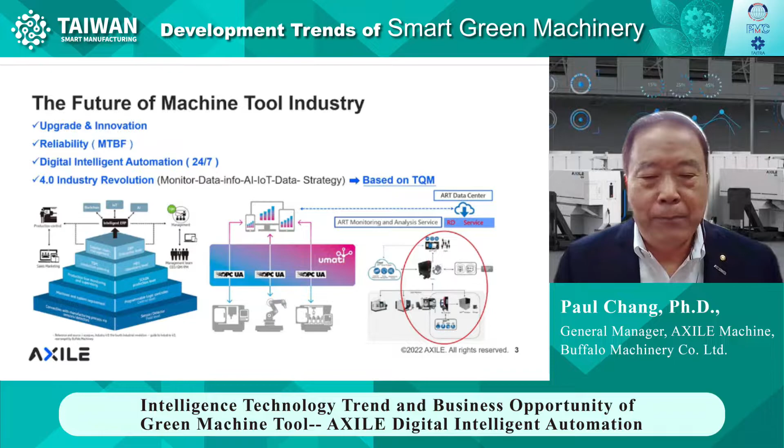Then we're talking about the 4th industrial revolution. It is, of course, based on TQM, total quality management. Only this way can you then match perfectly. Here to give you an outline about the 4th industrial revolution. The idea is that no matter the business, you have one factory in one city, or several factories in one city, or you may have a global company with several factories in several different countries.

If all the machines meet the standard of 4th generation, then you will be able to share all the machine data and machine information to the cloud, and then go back to the headquarters management and planning department. So this is the way you are going to save and control all the production plan. That's the first very important concept that you may like to know.

Definitely, with this information, you will be able to do something like AI monitoring data. You will be able to have 2 weeks prior service notice just to make sure that you don't wait until the machine breaks down and then wait for the parts, wait for the service, and it takes too long. If you have 2 weeks prior notice, then definitely you have enough time to find the proper time and invite the technician to come to do the service.

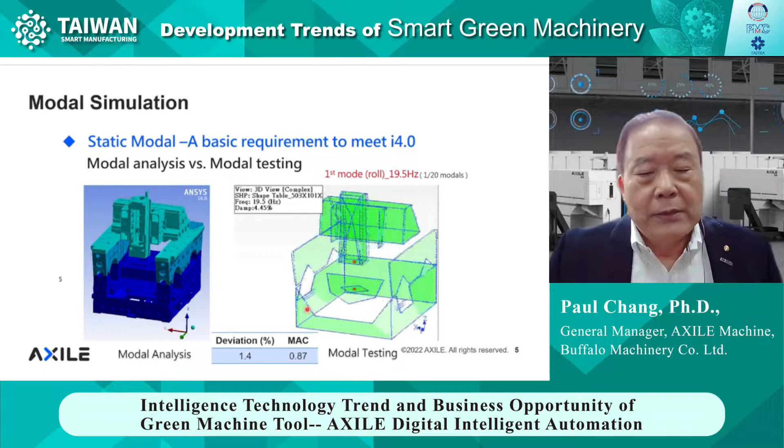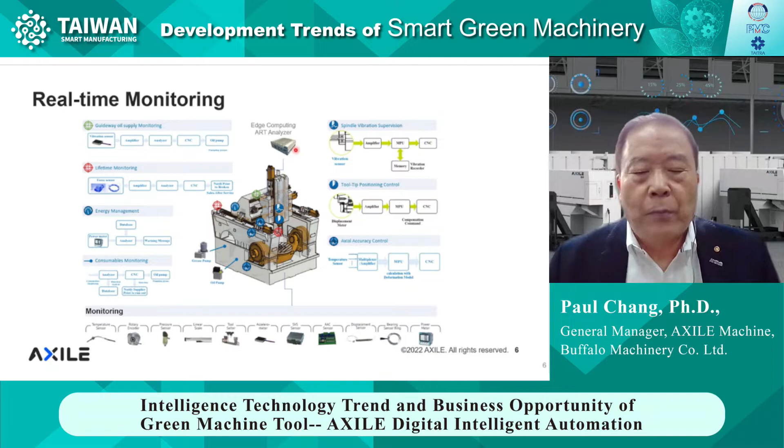So this is just to give you an idea - we use all different kinds of sensors to catch all the conditions on the machines, so it will be able to know the machine condition in time. With this information, we give it to the analyzer, which is the AI system, and then you'll be able to convert it into information shared with management.

Go a little bit further down - when we have all the sensors to monitor not only the CNC data, but also liquid, meaning hydraulic or air, and also the wearing components, then you know the condition of all the parts exactly. Then you'd like to know the life of the machines.

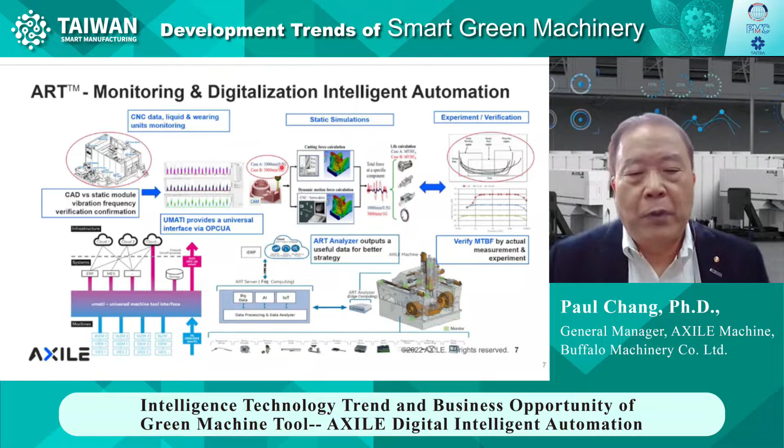So you have the so-called MTBF, and this is really a simulation. You give two different conditions, for example half G and 1G acceleration, and by this way you work out your MTBF value. But this is, of course, a simulation value. After that, you may like to do a long-time experiment to prove that the simulation meets that value, and then you can give it to the customer precisely.

And coming down to here, as we say, we use many sensors, and through the ART analyzer it becomes big data, and with the AI calculation, you get all the information shared to the cloud, and management can use that. This means not only people working in the company, but also if management goes home and would like to know in-time information, they'll be able to use their portable device like their pad, their computer, or their iPhone - they can check right away.

But one condition very important is that the information coming out and shared with management should meet one standard. For the European market, it is today called OPCUA - it's contributed by CECIMO, they call it UMATI. You have to meet this standard, and then anytime when you sell one machine to a factory, they already have a 4.0 system, they'll be able to exchange information with all the different brands of machines. So that is one thing very important - you make sure you want to do it this way.

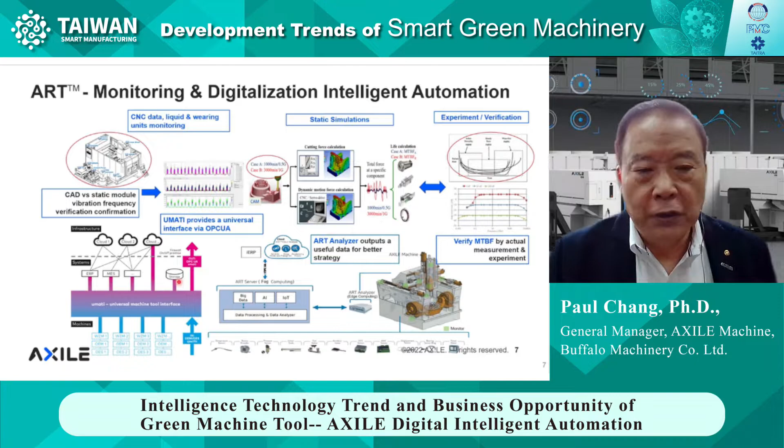Then let's go further to know how the monitoring system works. With the ART system, the monitoring system, you have two levels to see. The first level is immediately you're going to see all the machines under control - their working condition you can see right away. Then you go further down to the second level, you can see every component shown by figures. So you have all these figures, you know what's going on with the machines. And this data, as I mentioned earlier, you'll be able to see on the portable device.

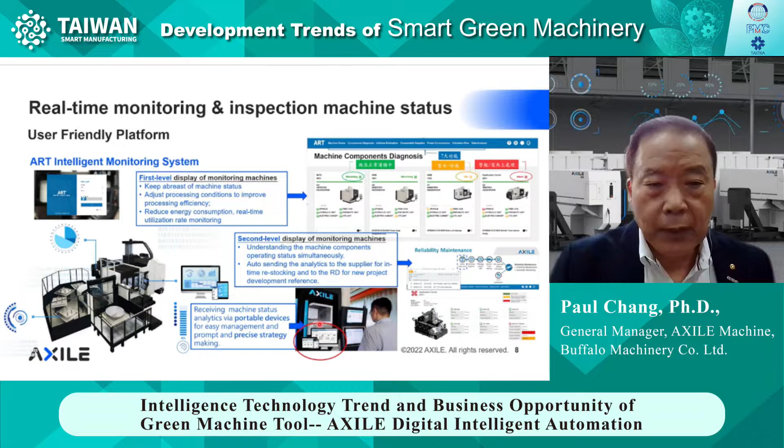So this is the first step about the design. Then I would like to go further - it's also important to consider the life estimation of the machines. We all know when you try to get a big order, you'd like to know how long the machine can run continuously, so lifetime becomes such an important issue, as well as utilization of the machines.

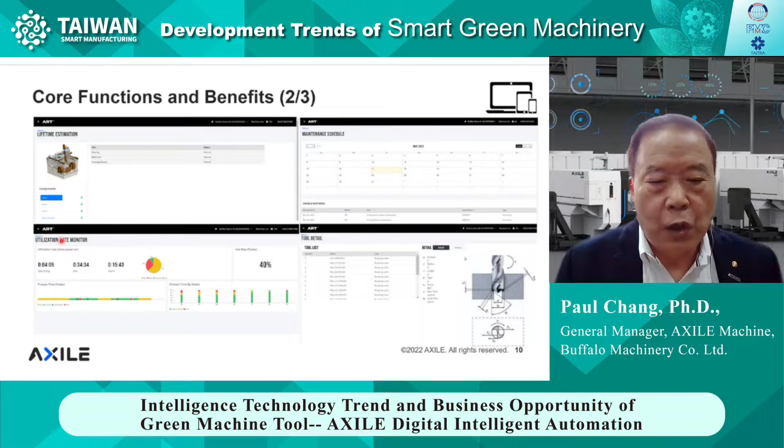It's not only to see your productivity, but also to know if you can meet the target time you'd like to deliver the job back to the customer. So all this information you can find from the ART system. Power consumption is definitely becoming very important today as we're talking about ESG globally, and every piece of equipment costs some power.

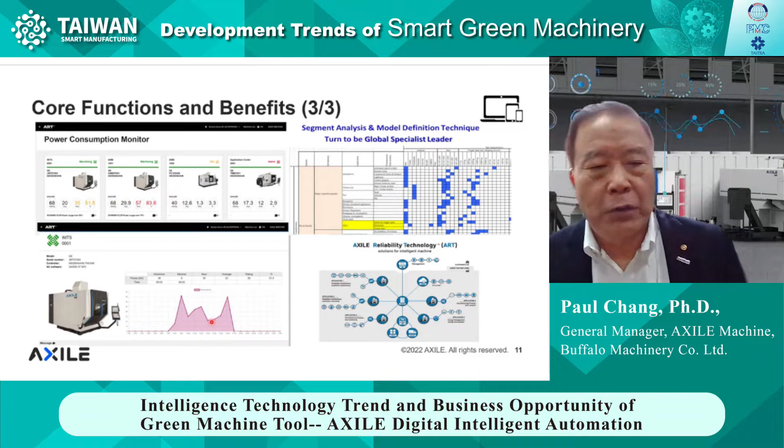It's important to use the machine under the best condition. You can look back over the last 30 days and see which days the machine cost more energy because the program wasn't under perfect condition, or the tool wasn't in good condition. By looking back 30 days, you can see that for certain periods you actually cost a lot of energy, and this energy equals the carbon you created. It costs you money. So management may like to check every regular cycle to see if the machining program is right, and also check the tool quality to make sure the work is perfect.

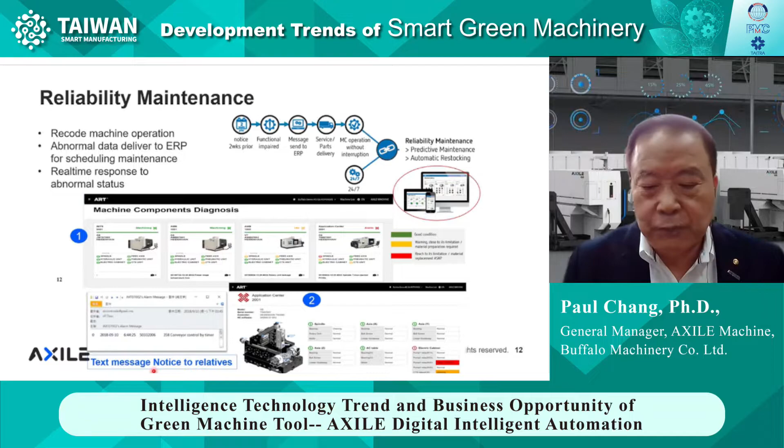For reliability maintenance, whenever one of the components is nearly going out, not only does the system notify management to send word back to the manufacturer, but the operator also gets a text message right away. So he knows one of the components is nearly out, and he can make an appointment to fix the machine and make sure it's working perfectly.

So let's talk again about energy management. Energy is related to carbon reduction, as we've been discussing a lot today. Later on, I'm going to share with you directly the information from Malaysia, so you'll know even with big power machines, how you can save your energy.

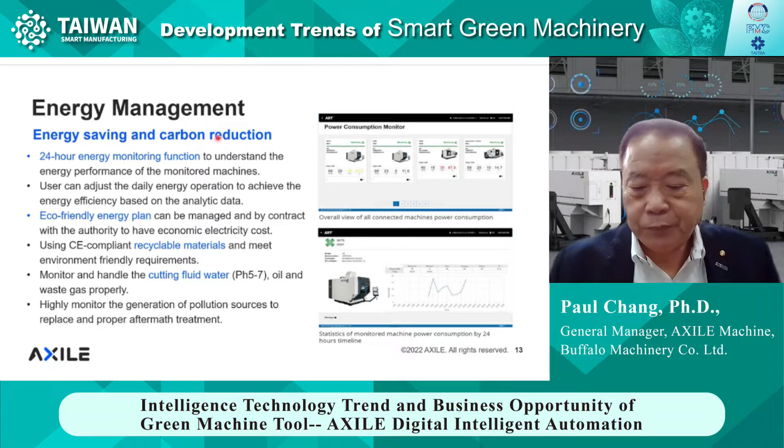From AXILE, we have all different kinds of automation machines, the 5-axis types. We want to make sure every machine can run 24/7, which means this is digital intelligent automation. It's no longer a traditional long working line, where you have one line with many machines, but if one machine breaks, the whole production line stops. This is a totally different concept.

Why a 5-axis machine? Because with a 5-axis machine, you can put one working piece on the table and complete the entire machining job already. Also very important is tool life prediction, which is included in our ART system. Tool life means knowing under which conditions the tool is working properly. If it's not, you have to change the tool. So we keep monitoring the tool condition, and in case one tool goes out of standard, you get a message too. This makes sure the machine is always cutting under good condition.

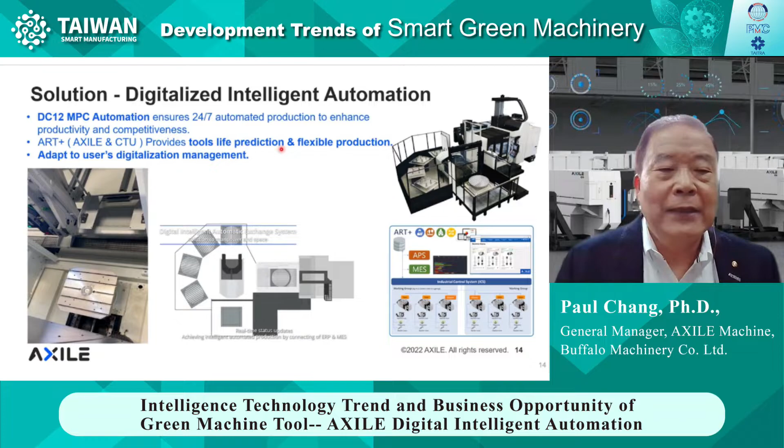After the raw data comes in, the AI calculation produces such a report, so management can easily know how the machine is being applied and used. For example, this single machine which we sold to a local customer - when we get the message, you can find two things immediately: what's going on with the x-axis, y-axis, and z-axis not moving, which means the machine isn't being used. Why isn't it being used? Management may like to know.

We would like all the axes to move almost the same distance, because then you know the machine is always under normal condition - not just one axis being heavily applied while the other isn't. Looking at this table, you can see the y-axis traveled almost 2.5 times more than the x-axis and z-axis. But the x-axis, the biggest axis, isn't moving. Why is that? That's a program issue. So you'd like to change the program and tell the people, so they know how to perform under the best condition.

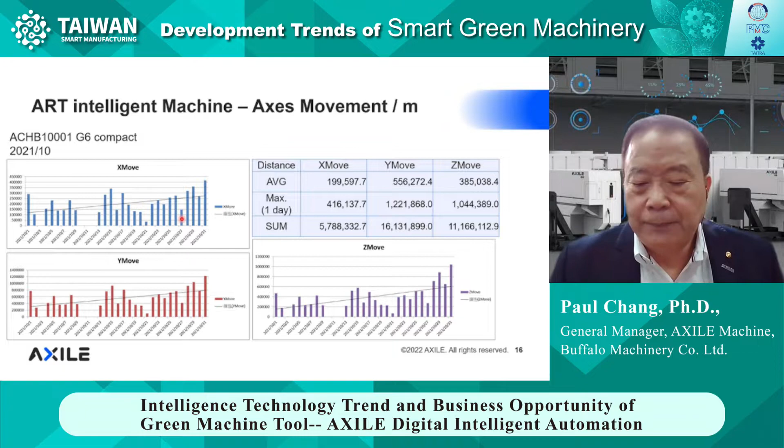Here is about lubrication. Oil can create a lot of problems. Our machine doesn't use liquid coolant or liquid hydraulic, but if lubrication oil gets into the coolant water, you create a huge quantity of rubbish coolant. This dirty coolant isn't okay to throw away anywhere, so it costs you a lot of money. So you may want to check the condition of the lubrication system. Again, the ART system provides this kind of information for you.

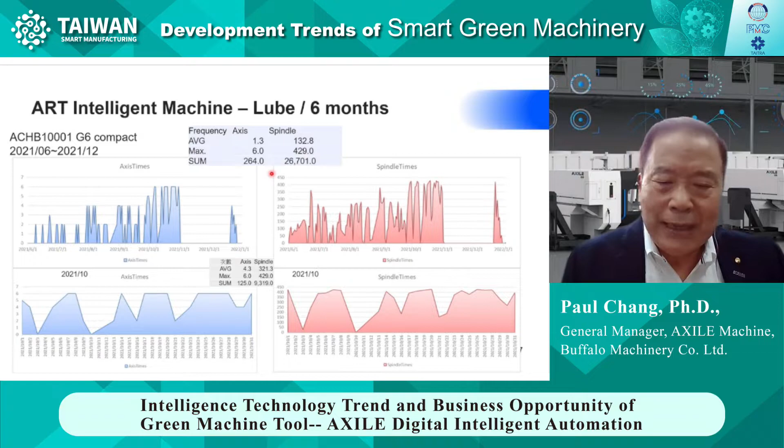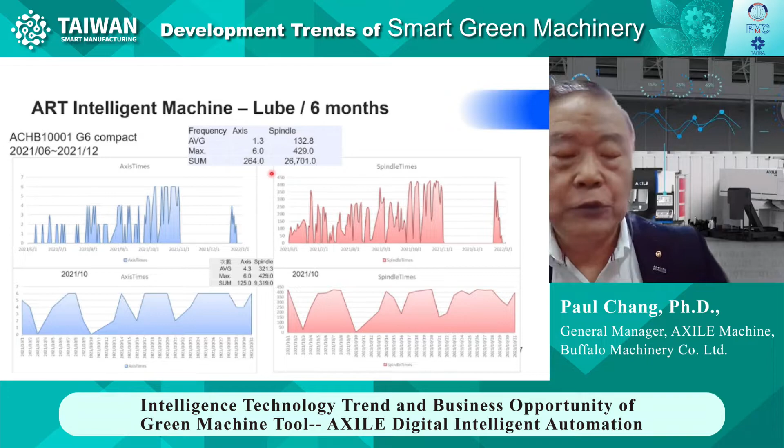Today I'm just taking some examples to show you how this ART system supports clients in using machines properly.

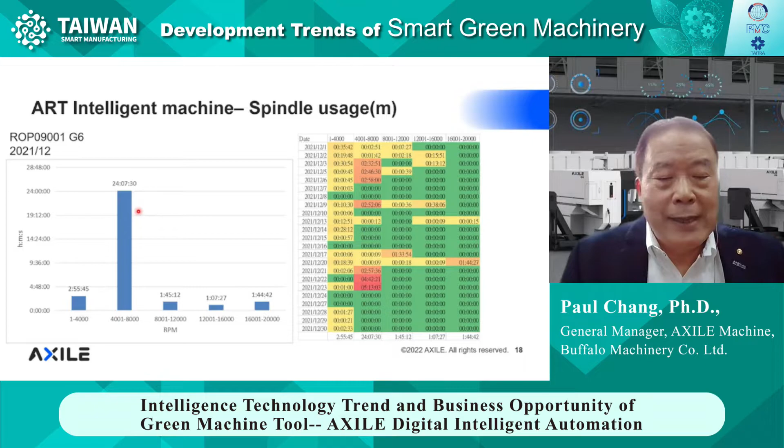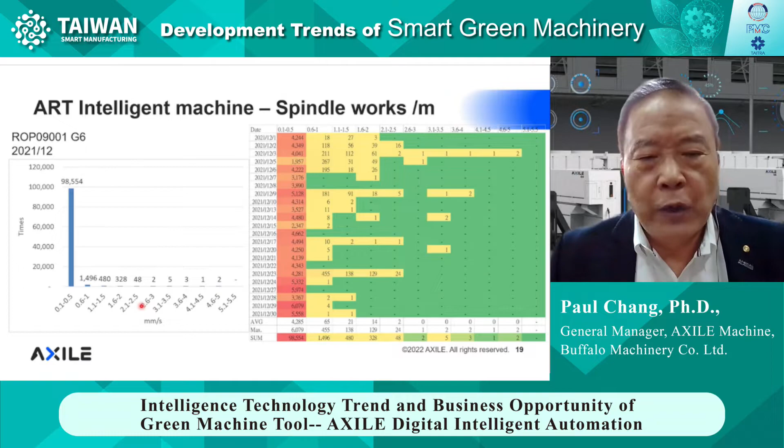Here also, to see about the spindle, you can see a very strange condition. The spindle runs only 0.1 to 0.5 hours at a time, always for such a short time. And then the speed is changed very often, which means the job is always working at a certain speed. This is not a very good condition. You want it always running at the high end, so you can change the speed and perform the best condition on the working pieces.

So again, this is information for management. And here also very important, for a CNC machine, especially 5-axis, it is so sensitive about the spindle bearing temperature and the room temperature.

You want to make sure that the temperature rise of the spindle bearing is under control. From our standard, it is always maximum 5 degrees. So you know the room temperature is around 21 to 25 on this date, and here you can see the spindle bearing detected is 26 to 30. So it is working under normal condition, it is good. But you also find something wrong here, something higher than 5 degrees. Then you better go back and check the program, see what's going on, and improve it.

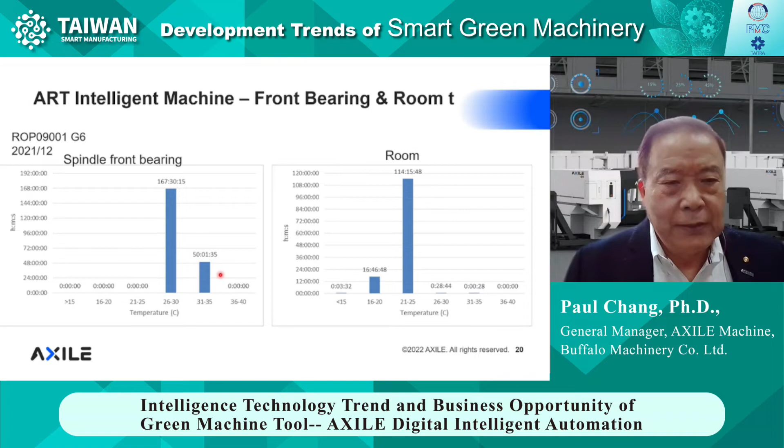So with all this kind of information, it is to improve the productivity, and to improve the production quality.

Then the energy consumption—this is, later on, you will see an equation, and you will understand why this energy needs to be calculated, why it needs to be summarized. At the end, you know you are creating lots of carbon, which means it costs the factory a lot of money. Here, this machine's maximum power is 28.3 kilowatt-hours.

But the average is running at 14.4. It looks not bad, but can we do it better? Of course. If you go back to the earlier slide, we can see he is always running at maximum 8,000 RPM. Under this condition, he is trying to do heavy cut, not high-speed cutting. With high-speed cutting, you are going to take a lighter power, and create a much lower average energy waste. So this is one way that we would like to share with the management also.

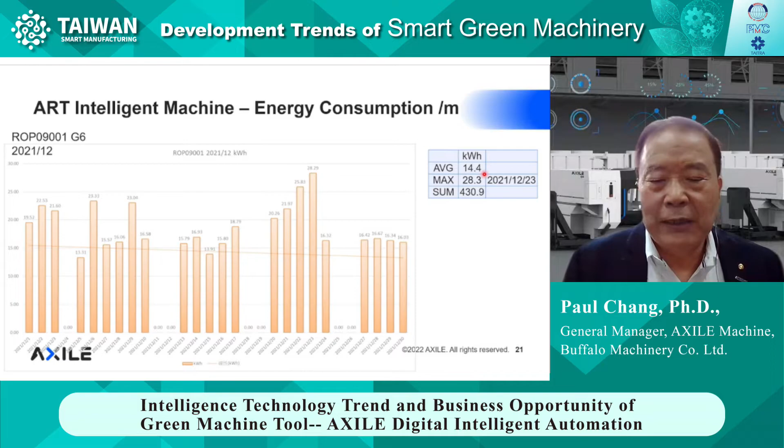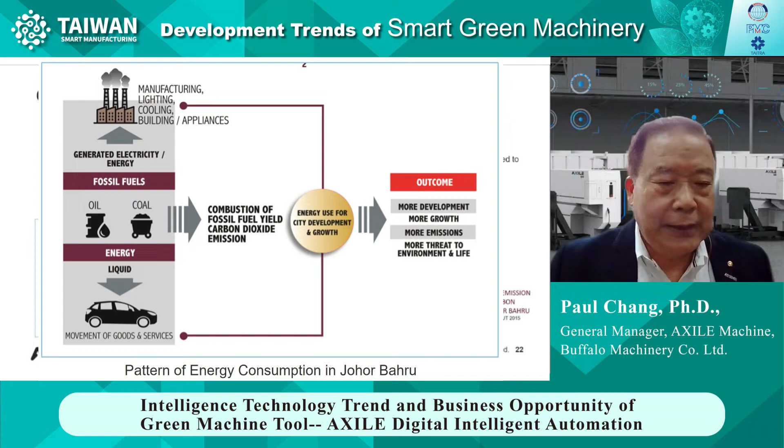Now, coming down from here, I'm sharing one of the papers published in 2015, talking about the energy consumption in Malaysia, and this is the city of Johor Bahru.

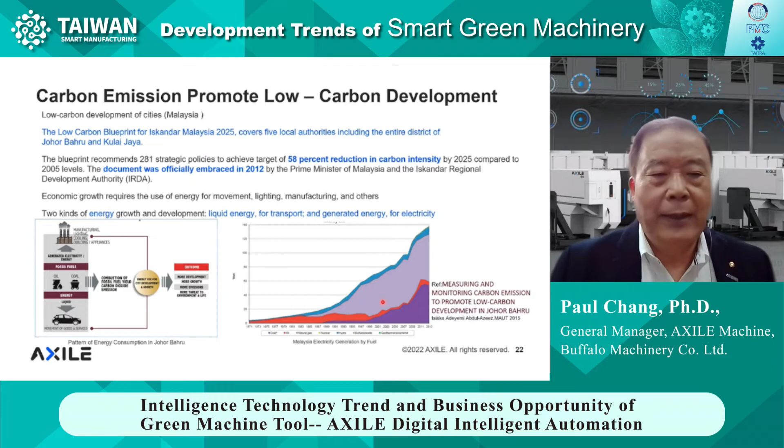This city considers all these two kinds of carbon emission coming out, and we can see mainly this carbon is coming out from the fuel. Coming down here, this is a normal calculation list, a normal check-in procedure.

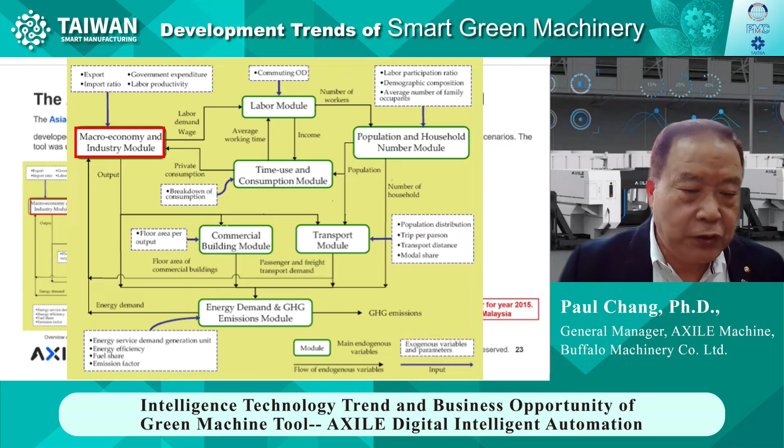So in general speaking, for the machine tool user, we are here. So the machine tool user is also being considered if we are creating too much carbon. The equation is here, but this equation is actually for the fuel. And how about the machine tool? Very easy, there is a formula.

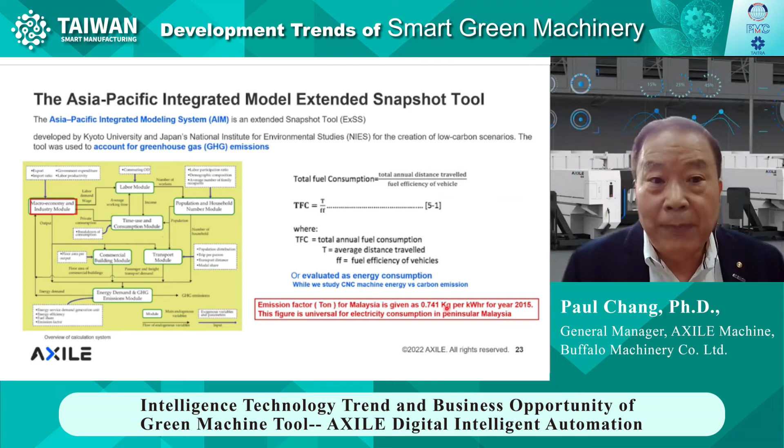So if the carbon is coming from the kilowatts of power you create, multiply by 0.741. This is for Malaysia. For Taiwan, it is different—0.502. And then you know how you use the machine, how much carbon you created, and how much you have to pay. So with all this kind of information, the end user will be able to find a better way to save the energy, to save the money.

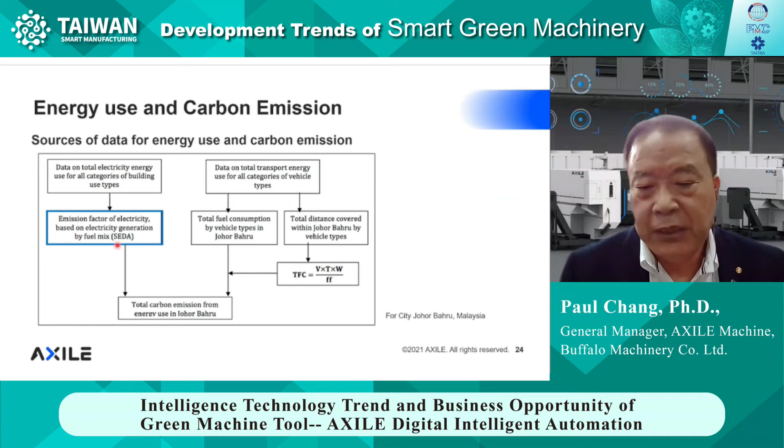Again, this is only to tell you that in Johor Bahru, this city considers emissions from fuel and from industry—so industry has been considered. So we have to be very careful how we use the machines.

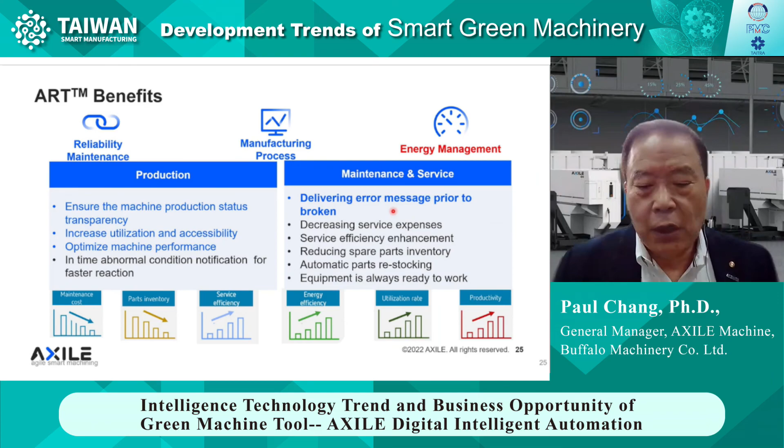So this is information that I would like to share with you regarding the updated machines and the carbon issue. I hope it helps you and shares some information that benefits you. Thank you very much.